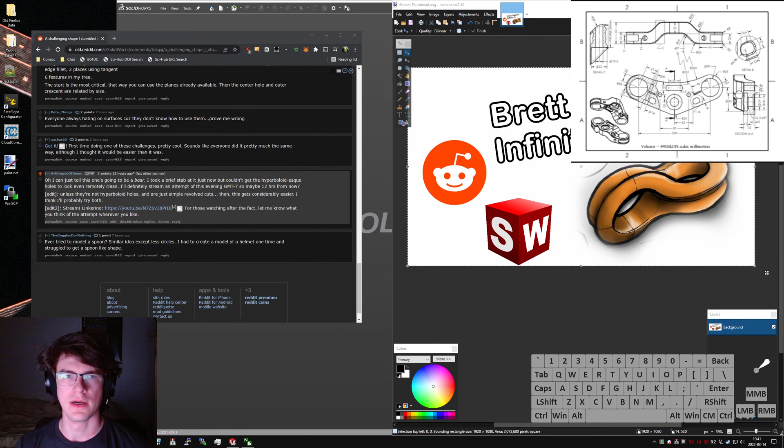So this post this morning from CADNurd, who is a CSWA and posts frequently to the subreddit. This weird shape, it's got kind of a... This drawing as it is, it looks like it was modeled simply, like this was just a curved, simple revolve, but based on the drawings, I could be totally overblowing it. Where's his link? Behance, here we go. So this is the original stuff from the guy who designed this. What's his name? Brett Mellor. Yes, Brett Mellor. From South Carolina, designs all sorts of things.

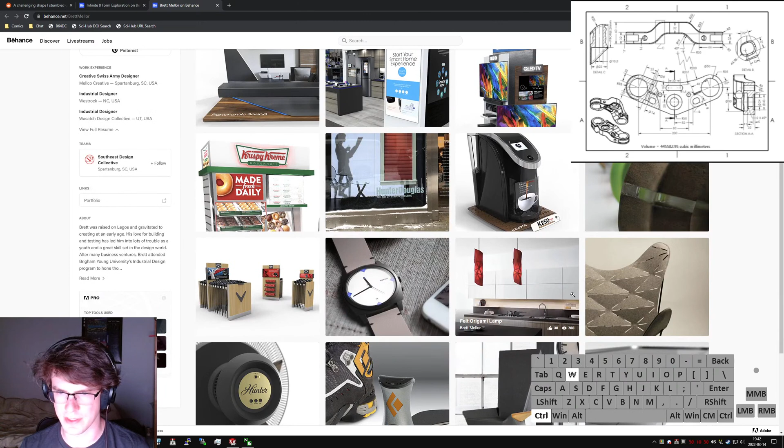The way this is drawn, and this line in particular right here, oh, there we go. That kind of makes me think that it's not really just a simple revolve, because it looks like that line's supposed to be straight, and those profiles are supposed to be straight as well, which is considerably trickier to model, because your revolved cut profile is no longer straightforward, and if you do it the easy way, that's just a single revolve, it would be a pain to machine that part unless you had a fifth axis. And we're machining this on the fifth axis.

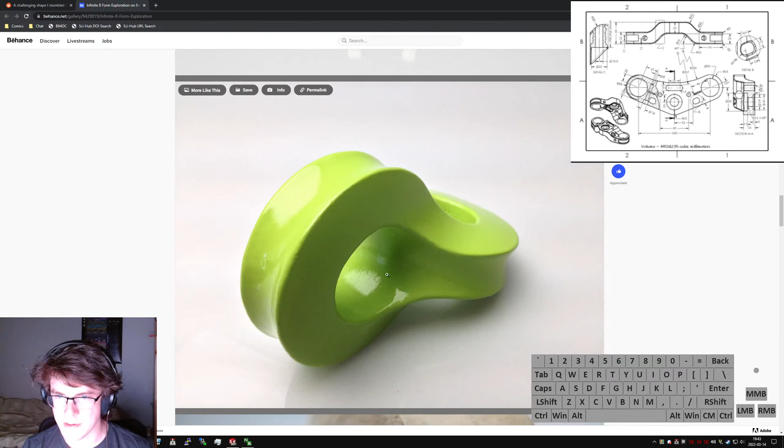Like you can tell, gotta have at least one other good view of it. Of course, he manufactured quite a few of these just because it's a fun shape to make. But the way that edge is shaped doesn't really look like it's a simple revolve to cut. Not to mention these straight sections, this looks like it's straight through rather than curved or concave in there. And that looks straight through as well, so it could be something he did after the fact to make it easier to machine. But I'm going to take a stab at first the easy way that everyone does it.

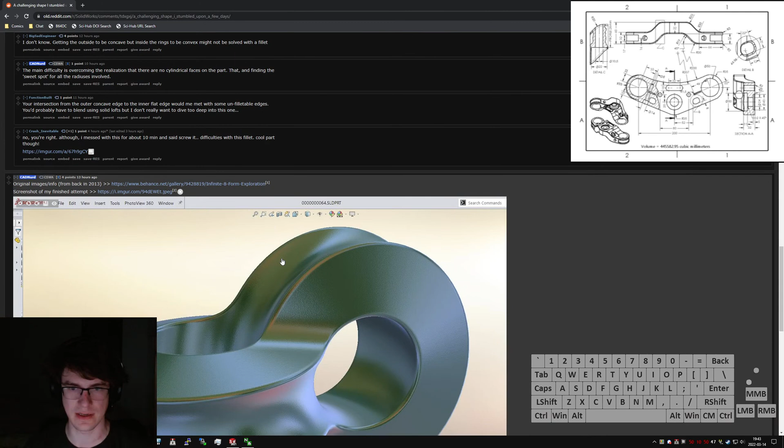Because I think the way I've been doing it is a little different than most folks. This guy up here, Smitty981, CSWE, so more experience, been around the block quite a bit more than I have. He's got 2 revolves, 2 cuts, 2 fillets, easy peasy. I'm going to do it a little bit differently because I want to try and use patterns, it's easier than drawing sketches and that sort of thing. So we'll hide that, pop chat out, drop it somewhere easy, and I just realized I left the reference image up that whole time.

From the last stream. Whoops. Okay, yeah, new part, let's go. Millimeters. So, pretty easy. What I have in my head is basically just 2 sort of cones back to back, and then with circular cuts on them. So we'll just do a quick sketch on the front plane.

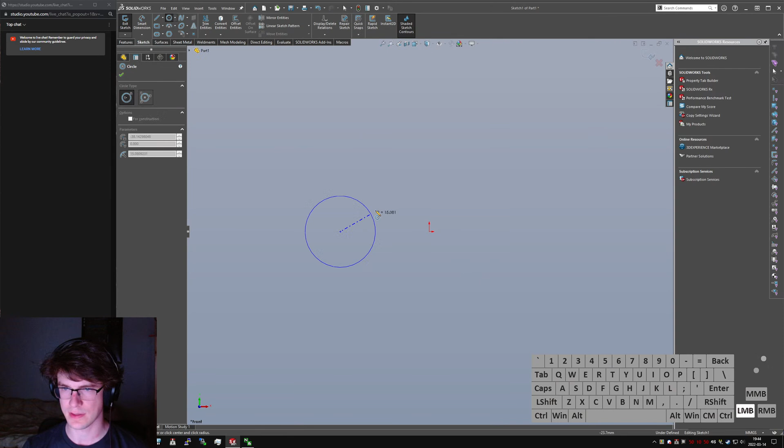Make this kind of like that. Give myself some lines here to define where I want all of my edges and things to be. Is that, come on, Alt-M? I don't get Alt-M anymore? There we go, midpoint, thank you. Okay, so these 3, oh, it wants to select everything. These 3, I'm just gonna make it equal. I think matching the form exactly is less important than the structure of trying to do it.

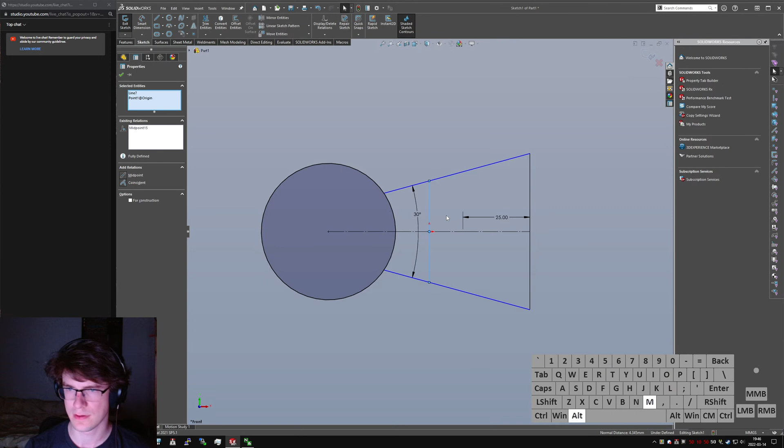So I'll just make that 25, I think, is what I've been going with. To be honest, I practiced this a little bit at work as well, because I just wanted to have a stab at it. Add these. Give this some distance, or some angle between them, and then what I've been doing is setting a height, using that, setting it equal to these, and that gives me a nice fixed height, and I think I have enough to work with here now.

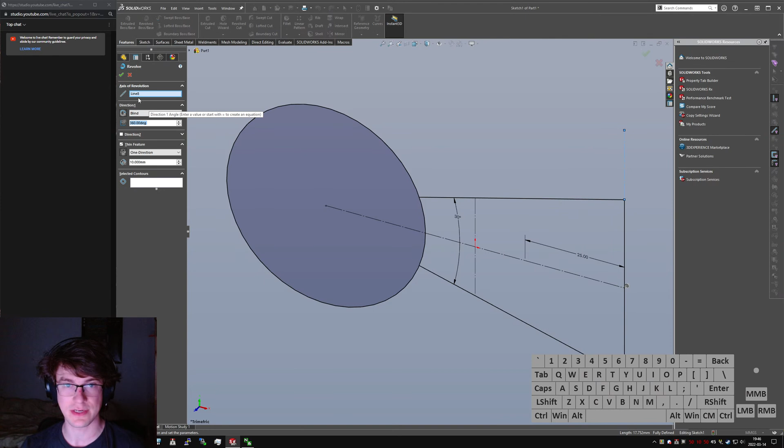So we'll do a quick revolve, say this axis. I only learned today, actually this morning, that you can pick a solid line as your axis of revolution, which is great because now it means I can make solids more easily. I always used to add an extra construction line up top. I'll even show you what I mean. I always added an extra construction line up top and tried to avoid using construction lines wherever I could so that when I hit revolve, it would just automatically grab that one and make revolve for me. But you don't need to do that, it turns out. So we'll just quickly get rid of that.

Only as much detail as you need. So let's add that axis, selected contour, this one. What? Results in contour? Wow, come on now. I didn't do that earlier.

Is it picking? What line is it picking? Okay, that's annoying. Maybe it does want that extra line there.

We'll do a revolve. Neater, neater, neater. Axis, grab that one. Contour, grab that one. Oh, thin feature. Durr, I don't want a thin feature. Maybe that was why I was complaining. Doesn't matter.

All good. Glad you came. Always glad to have eyes and just someone to look at the weird stuff I do. So, thank you. Have a nice night.

Okay, so got that structure in place. The way that I did it, and this is definitely not how most people would do this, there is some rotational symmetry. Yeah, always glad to have people watching later. Super appreciate it too.

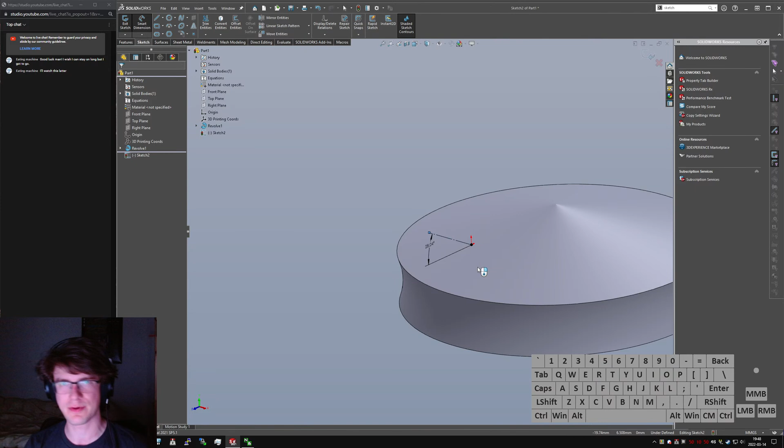But I think this approach is a little bit unique, recognizing the symmetry in the shape. Recognizing the symmetry and that there's an axis that goes right through here that the whole thing is symmetrical about. So using that, I can have a sketch there.

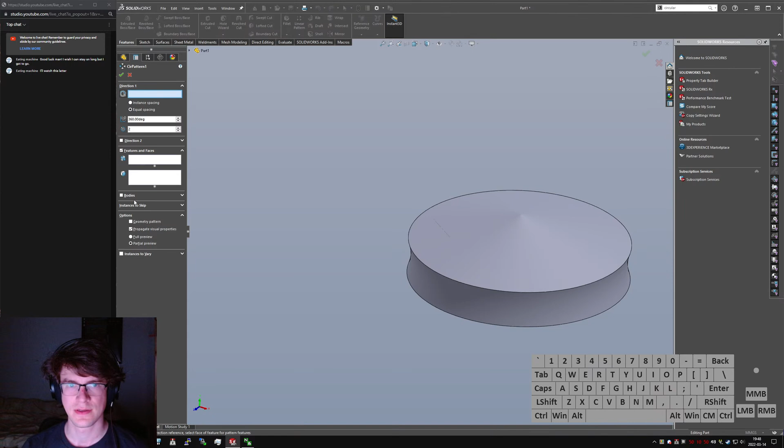Do circular pattern? Where are you at? We'll just add that and grab this axis. There we go. And now we can do a revolved cut.

Using the sketch we did earlier and adding that circle back, which is why I added it. It's tremendously powerful to have multiple features in your sketch if you can manage it.

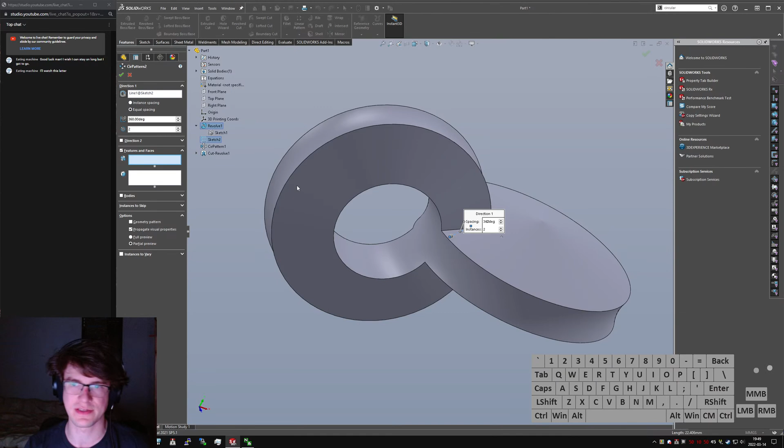And do a quick circular pattern. Grab that, features and faces. Fun fact, if you click here, it won't actually do things right because this face was created by the revolve feature, and that means that when it goes to try and figure out what feature you want to grab just by what face you clicked on, it's like, oh, you clearly want the solid revolve feature. Because the cut revolve didn't actually add a face. This face is all contiguous, so you have to click it from the tree.

But it patterns around, gives you your hole. Do a quick, I think 30 is about right for these. And you can do connected to start face too, which is nice. And 30, fill it, all edges touching this face and this face. Make that like 2 mils.

And yeah, there's, hang on, where's the Reddit post? Did I really close it? I'm gonna feel really stupid if I closed it. Yes, here we go, okay. I did kind of close it.

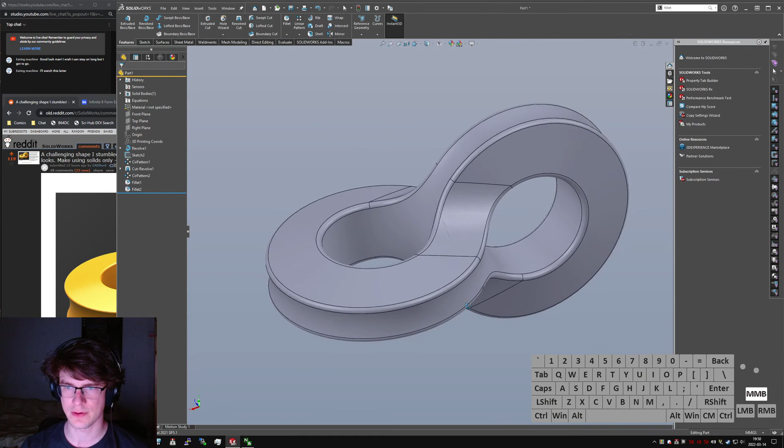Oops, we're the wrong way around. But yeah, there we go, there's our shape. So this is, fundamentally it looks like it even matches in the reflections in this model, but I think this is CADNerd's attempt, not... well, we'll zoom in a little bit and look at the post again.

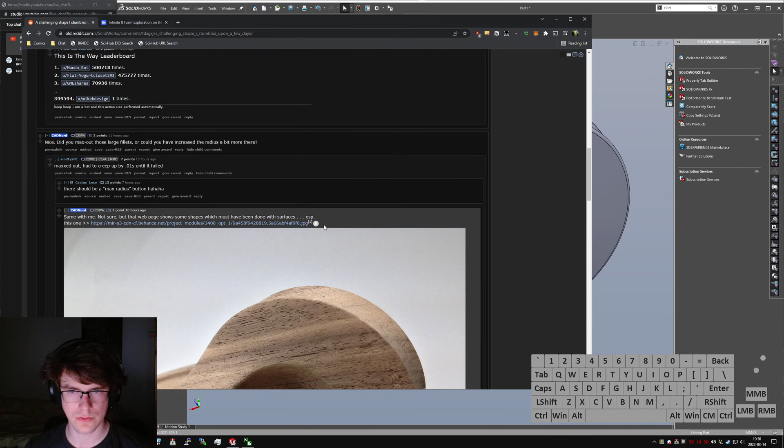Must have been done with surfaces. That actually you don't have to do with surfaces. Let's show how to do that with not surfaces.

Instead of doing a cut revolve, we'll suppress all that and go back up here. And let's do a sketch on the, hang on, what sketches have we got already? We've got this sketch. Yeah, let's use this. Okay.

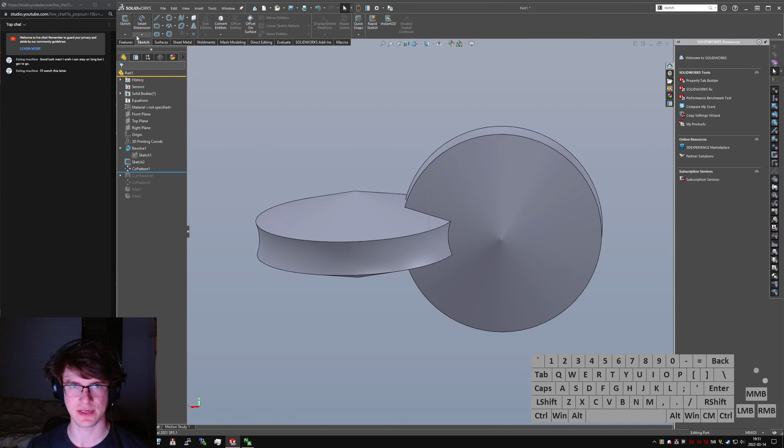Oh, how can we do this? This is gonna be weird for sure. I don't think I'm gonna reuse a sketch to do this actually, because that would be frankly rude to anyone looking at this model in the future.

Let's pop a sketch in here. Okay, I want, well, I will have to reference this sketch just so I can grab all my points, but we'll grab a center point, say here to, ooh, whoops, no, I want to be on this, I want to be on this center point. Let's go here and around and make it coincident with that. And that'll lock it in. And then, oh, how do I want to do this? I'm going to try a swept solid, I think, is what I'm going to do.

Let's try a swept solid. Okay, so the way to do that other one is like this. Whoops. Nope, don't be coincident with the horizontal there. That would be kind of annoying. Just make that like that. Trim that and that.

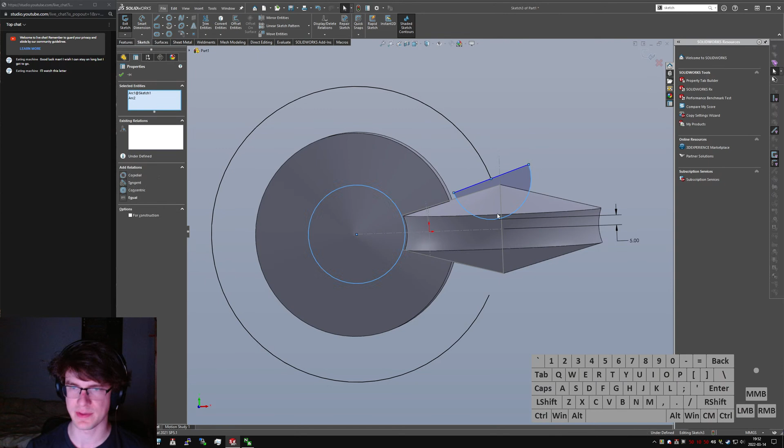Okay, so now we can say that we want to come... let's have 5 millimeters of space. And we know that has to be the same diameter as that, or we're just going to kind of guess that it has to be the same. And we'll make this—I think I'll add another line here, make that tangent, and make those perpendicular.

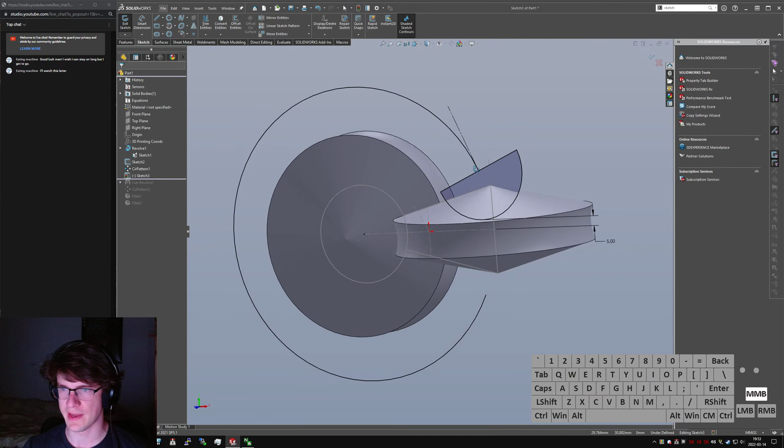And then I can add a revolved body up here. Ooh, no wait, that has to contact there for that to look right. Ooh, maybe I can't do this this way. What does the other one look like? That's really close.

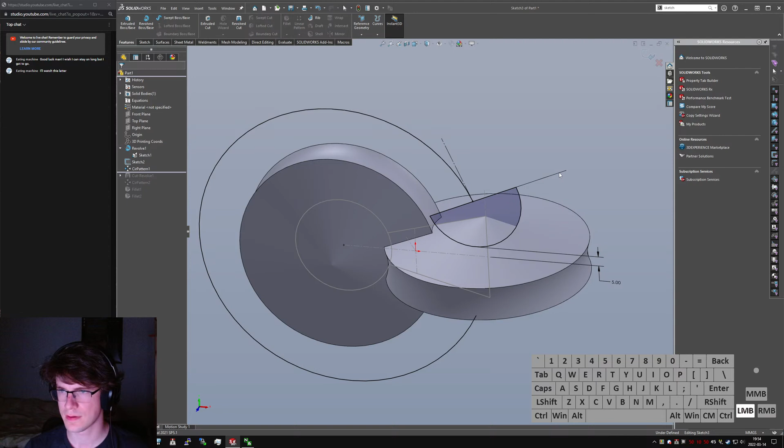Yep, so I'm going to add an extra line up here. Let's make these all the same length, just so we don't have anything left undefined at the end of the day. Not a thin feature, just selected contours, only about this axis. What? Oh, it's trying to merge result. Don't merge result. There we go.

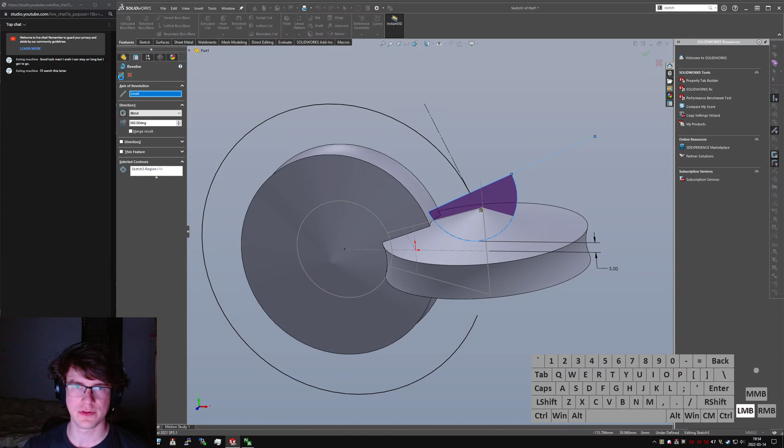Okay, now we go to this sketch, and we briefly wonder why it is... it's because that one's not defined. Make those vertical, and then that's fully defined.

Okay, now swept cut, solid profile, select a solid, this one, pop open the sketch we did earlier, use quick visualization anyway, and say give me that path. Path must be fully tangent, continuous, and solid sweep. Ah, okay, so I do need a new sketch.

I'll just pop it into the front plane here and say convert. Come on, come on, you can do it. There we go. Convert. Okay, exit sketch. Now I've got a reference sketch. Hide this. And what's this one doing still?

It's like I'm still in a sketch. Why is it still showing those? Oh, I never even saved this. Dirt.

Very smart. Okay, we'll call this Infinite 8. And I forgot to save it with the other features, so I'm going to save this one as Infinite 8 Clampy. I don't know, I'll figure it out later.

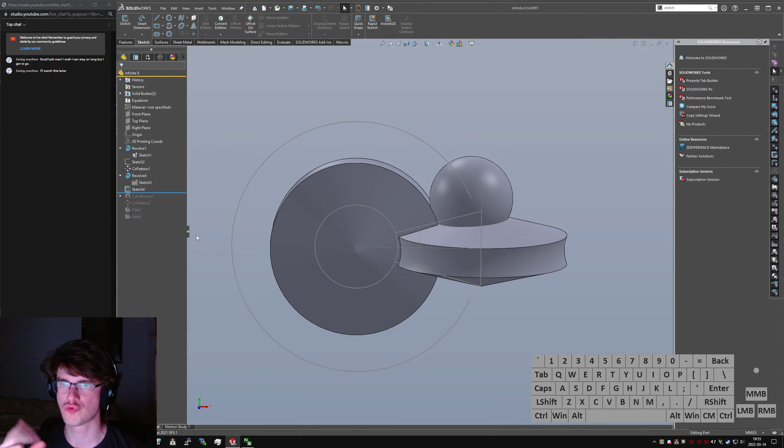Okay, so this should be hidden. This should also be hidden. No, wait, no, I can pick it later. That's fine.

Swept cut. Solid profile, pick this guy, and that sketch. There we go, our little dimple. Doesn't look right. Don't know why it doesn't look right.

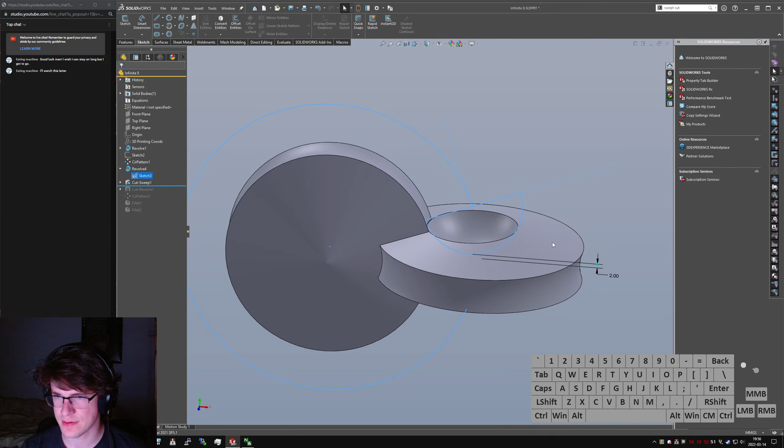What happens if we bring it a little tighter? Say 2 millimeters. Yeah, that doesn't look right.

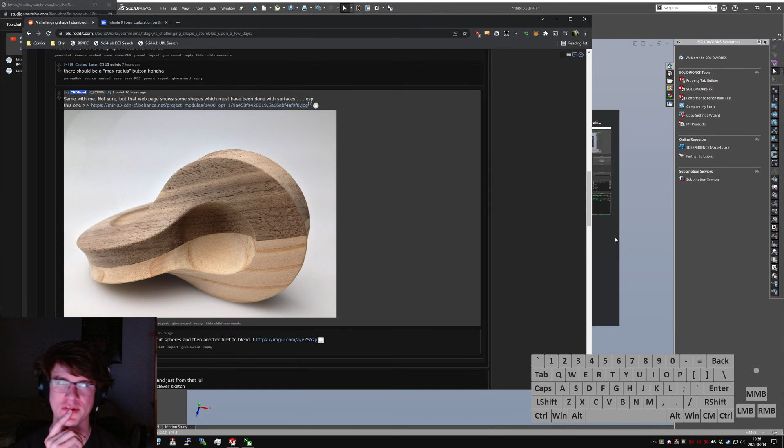This is not a simple shape, and everyone who says that it is didn't look very closely. Because eventually, if you want that to actually match up, we'll just go in here and quickly—let's see how I got this defined right now. I've got that defined with that, but if we instead define it by making that pierce there so that it's continuous, it still doesn't... well, and then the cut sweep self-intersects, so no, it won't work.

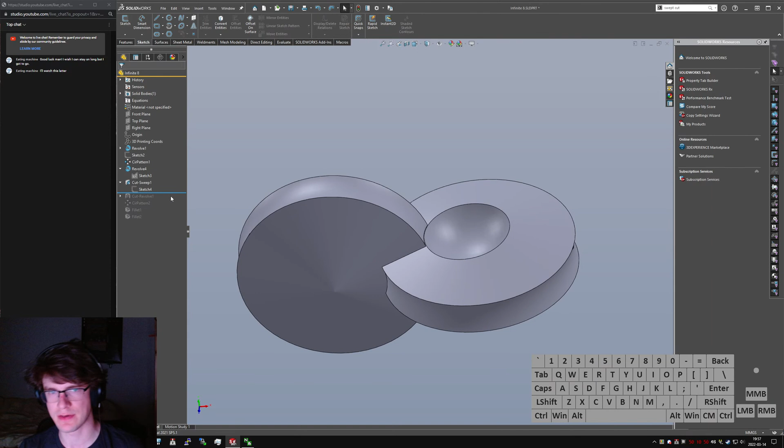Yeah, this is not trivial. Yeah, okay, so let's back out of this a little bit. Let's pop you two out. Sketches. Okay, so we got the infinite 8. Save as—we'll call this like Infinite 8 dash Hyperboloid.

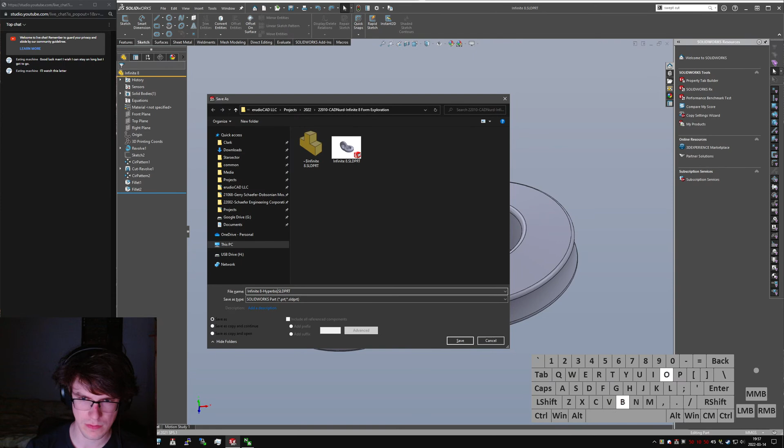Because these are supposed to bend out, I think, and it's really not clear to me how that's supposed to work. So let's come back up to the first cut. Boss, top plane. This is going to look weird for quite a while until it gets to making sense.

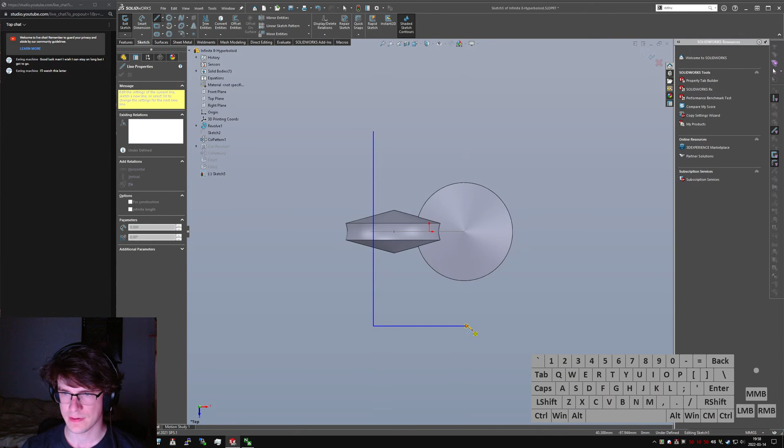More concentric. They're already concentric? They are now. Coincident. Again, it's like midpoint. Rather than being coincident, I want Pierce.

Okay, so then this gets basically as big as it wants to be, which is probably fine, but I think I'll limit it to... I'll limit it a little bit so we can have these two be equal. And also construction.

And now we'll do extruded boss base. Oop, I have to go check that sketch first to figure out how thick it needs to be, or rather which dimension I need to grab. I think that's—did I make that D2? Right click, something, come on, just give me the name.

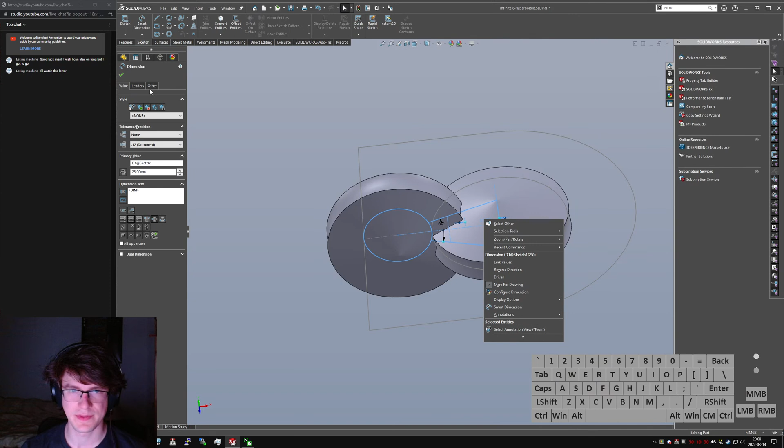D1 sketch 1. So I'll do double that for this thickness. D1 at sketch 1 times 2, and do not merge, and be midplane.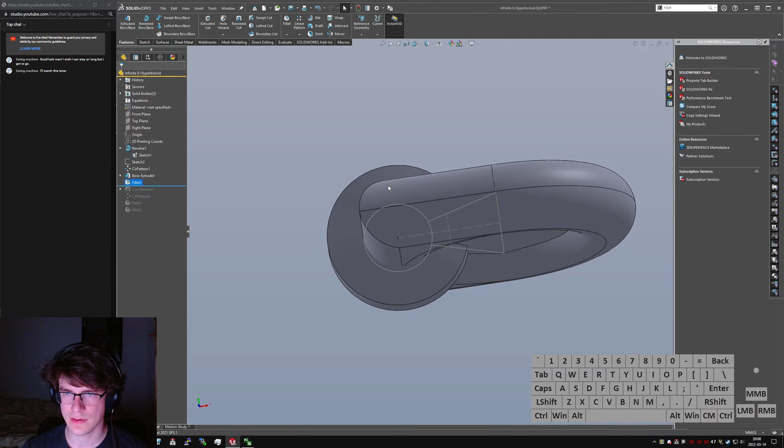Now I go back and I add fillets that are equal to D1 at sketch 1, and we'll do here and here. Go quick subtract, or combine rather. Subtract, main body, secondary body, let's go.

Okay, so now we're closer to the hyperboloid, but we're not actually quite there yet, because we have this flat profile, but we're not expanding outward. So I need to—once I've filleted it, which I think I don't want to do that way, now that I look at it—just this face and just these two.

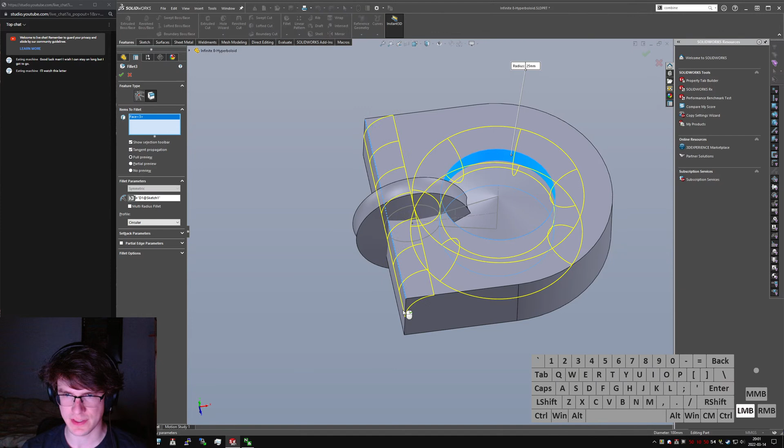It's like, how do you cleanly make that transition? Let's try something. Let's try sketch on the top plane. And I'm gonna try something like that. Some natural symmetry here, make that vertical.

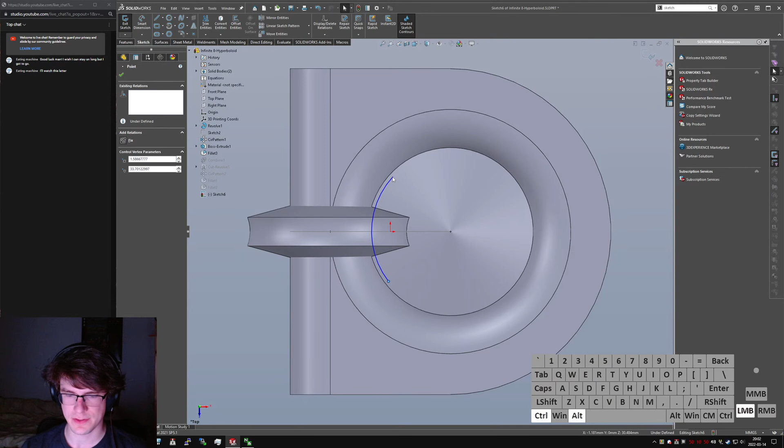We hide this body since we don't really care about it. Make those co-radial, I think is what I want. Make this, say, 50 millimeters high, that's probably good enough.

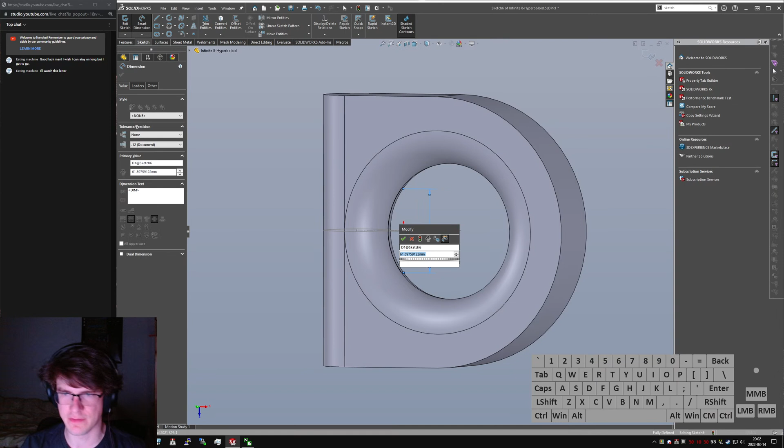Then we're going to add another quick reference axis and define its length there, and then do revolved boss. Sketch is currently open, I do not want it to be closed. I would like it in revolution. Auto select, do not auto select. Select only that one.

And that's the problem. That's the problem you will run into, is that if you then combine it, you somewhere eventually end up with a sharp edge.

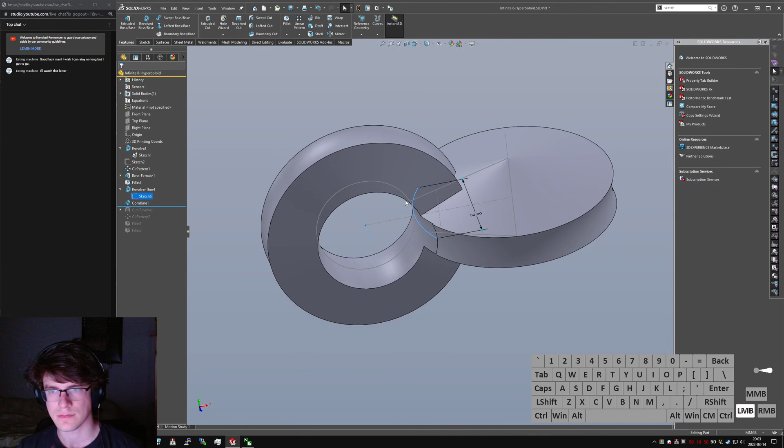Even if we make this, say, 75 — whoops, 75, not 43 — rebuild. Eventually you run into an issue there.

And now it does have the right cavity, and in fact you could even — well, I guess you can't get revolved anymore.

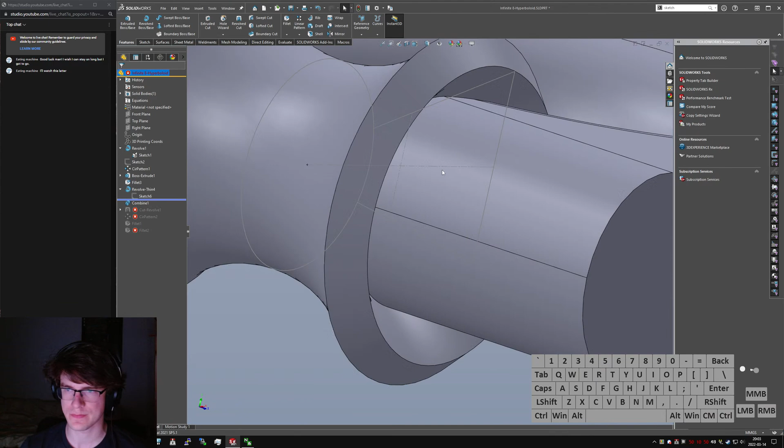This is the part I don't know how to solve, is I don't know how to make this transition nicely. And I don't think anyone else does either, so I welcome solutions.

I suppose I could do something like... what? How do you even shape that? How do you make Solidworks okay with that?

Oh, it doesn't like 25. I'll make this equal to D1 at sketch 1 minus 5 millimeters. Oops, 5 millimeters.

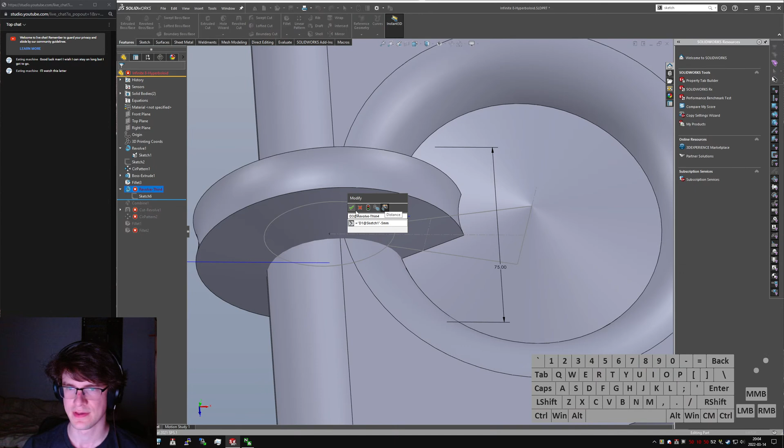Hang on, why is that going the wrong way? Something's wrong here, why is that? Oops, not the circular pattern. No, the thin revolve. Oh, I'm dumb, just clicked on the wrong feature.

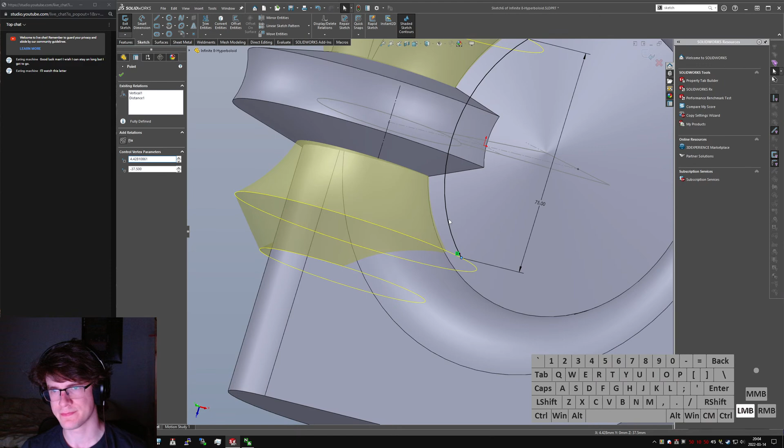Maybe. Well, let's try this, let's try — don't be co-radial. Keep the verticality, don't be co-radial. Instead, just drag you out of the way a bit.

And oh goodness, it's still... can I move this anymore? Oh yes, because that's still a point, so I can still make that independent.

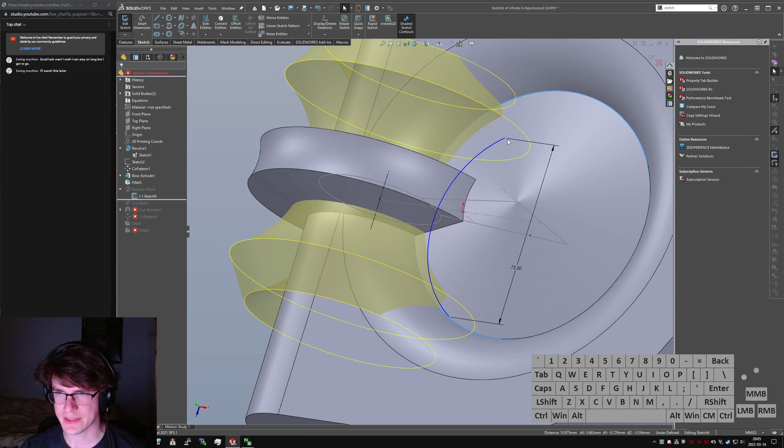I want this to be on these edges, but let's see, on those edges. But I also want it to be on that point. Let's try that — what does that look like?

When we combine it, does it subtract something nicely? Looks like it, and keeps the hyperboloid. Hey! Hey, there we go. Alright, let's shrink that a little bit so the effect isn't quite so extreme.

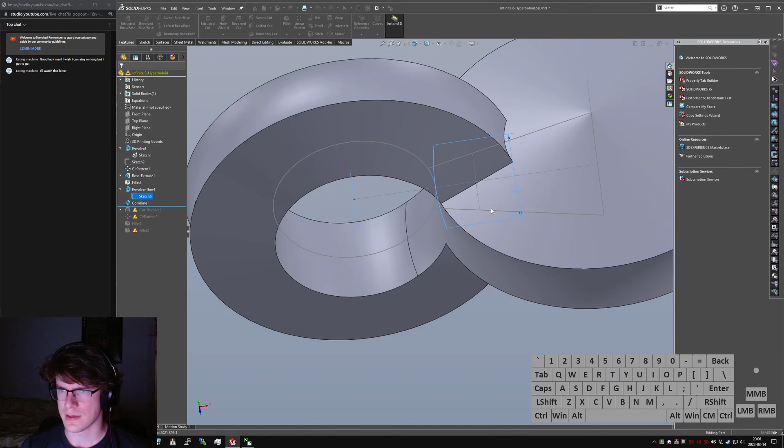And it looks like we can get more and more gradual. Oops, no, has to be at least, let's say, equals 1.5 times D1 at sketch 2 — or sketch 1, if I could spell sketch. There we go. Okay, maybe 1.25?

Oh, let's rebuild it and see. That looks good. Certainly comes a lot closer to — oh, actually, here's the real check: can we fillet these edges?

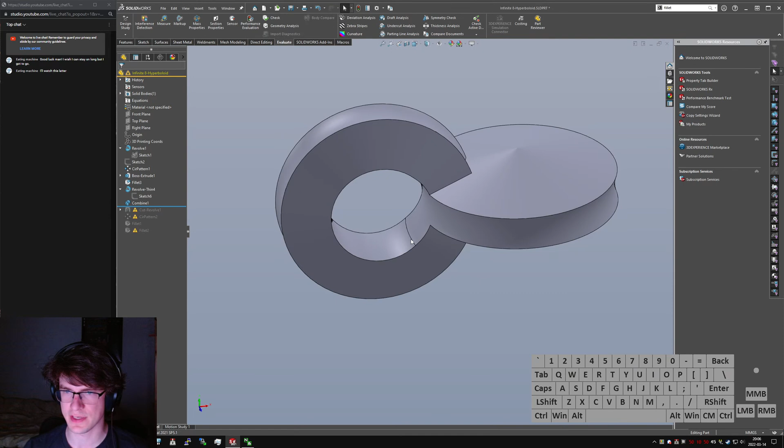And if so, by how much? Like, 1,000? Nah, I won't do that. How about 200? 100? 50?

Yeah, those are some really slight edges, like really minor discontinuities. But that's how you do it. And then if we look at it from the front, it's got our — it's got the section right.

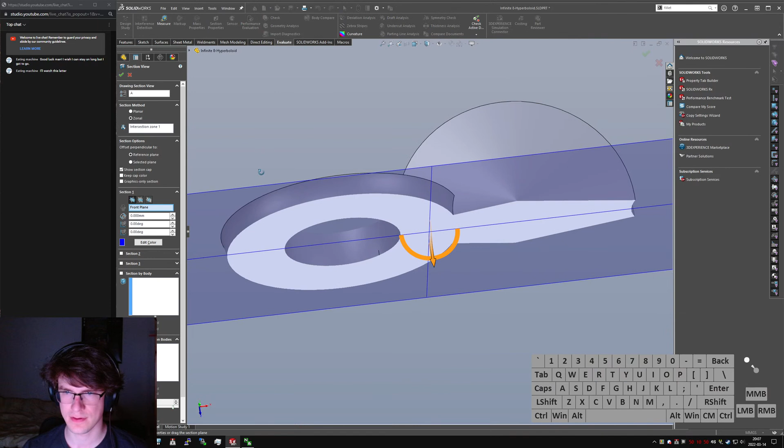Let's do this from the top plane even. Yeah, there we go, hyperboloid. And the curvature doesn't exactly match, but it's a lot closer.

So now let's pop the cut revolve. Or hang on, before doing that, let's edit the circular pattern to instead pattern the combine. Nope, can't pattern the combine.

Cool, okay, what we'll do instead is we'll move this down here. That's getting in the way. Edit the circular pattern to, instead of features, I want it to pattern bodies, and I want it to pattern this body.

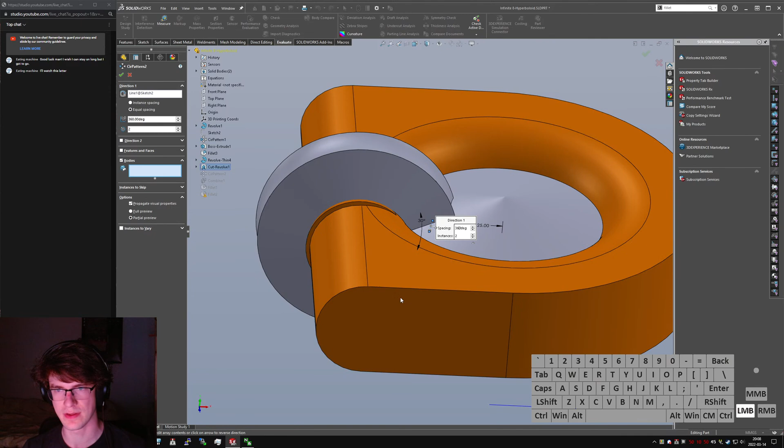And I want it to... I don't think it'll merge by default. I think it'll just end up with multiple solid bodies. No, wait, what? Did it just... what? Oh, oh hang on. No, it was combining, so now I have 3.

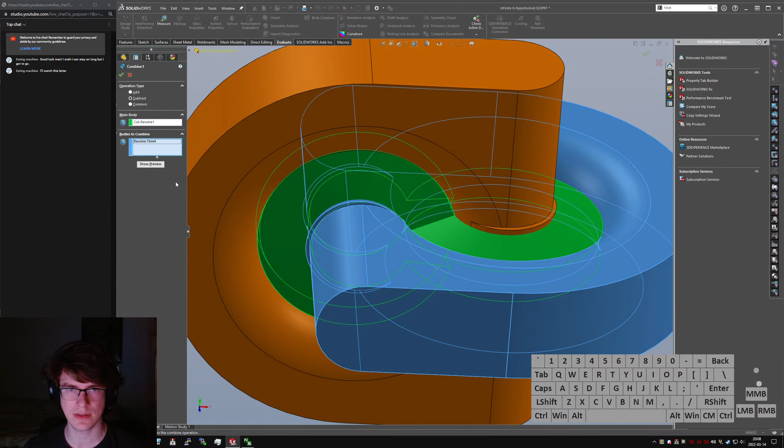But if I combine — bodies to combine — yes. Yeah! Yeah! And, oh, I was really hoping that last fillet was gonna work, but...

What's it complaining about? Oh, I see, it doesn't like those. So we can clear selections. Yeah, okay, so it doesn't want to pick those tangents. That's neither here nor there, really.

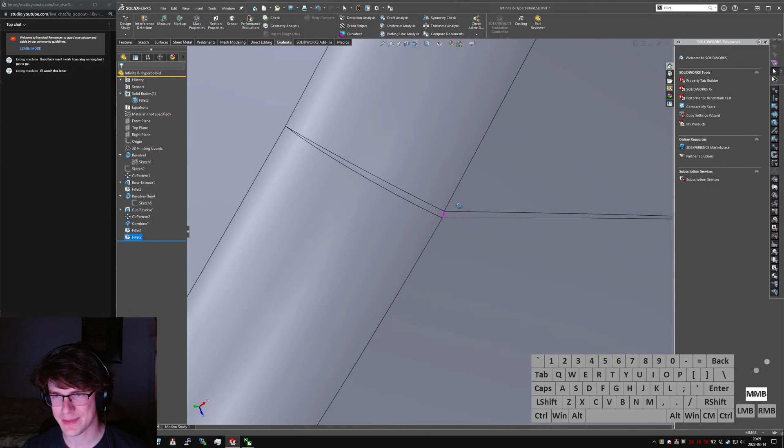Oh, hey, if I just pick everything, it works. Cool, I'll take it. It's a little bit gross in there, but given that this now accurately matches the hyperboloidy bit, I'm pretty pleased with that.

So the other thing you could do is, we'll just try it and see what happens. Curvature continuous fillets, it'll probably break because it has to be curvature continuous in some really weird ways. Oh, hey, it didn't break. It will, however, drastically increase the rebuild time. You could even check that. So rebuild time, that last fillet takes 4 3/4 seconds.

What happens if it's just circular? Come on, it takes 5 seconds just to rebuild its preview. So let's not do a preview, instead just be circular. Evaluate, performance eval: it takes 1/10 of a second, so drastically quicker if it's circular.

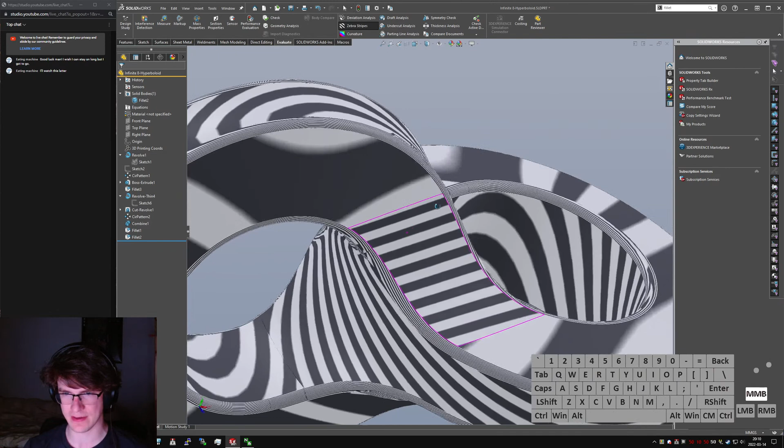And no one's going to be able to tell in a model like this. I mean, sure, you can... maybe somebody will break out like a... I have no idea, can you even monitor curvature in real life with anything besides, like, a... yeah, there's some minor discontinuities, but I can handle those. But now we match the hyperboloidiness, which is fun.

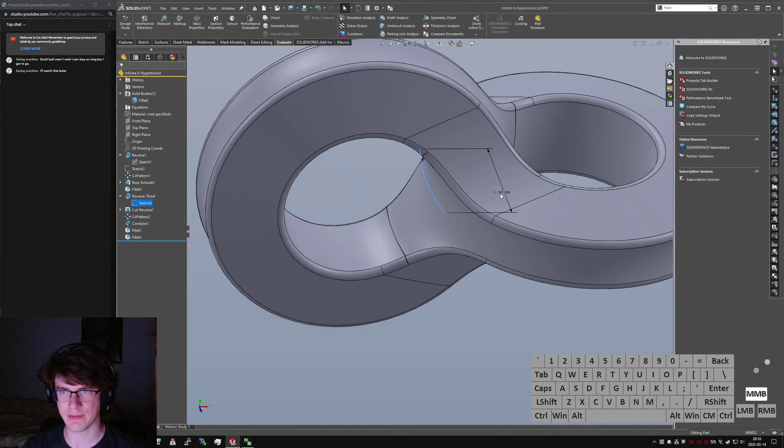What happens if I make this bigger? So if I bring the scale factor up to like 4, probably won't work, but 3 might. If I rebuild, it takes up more of it. Interesting.

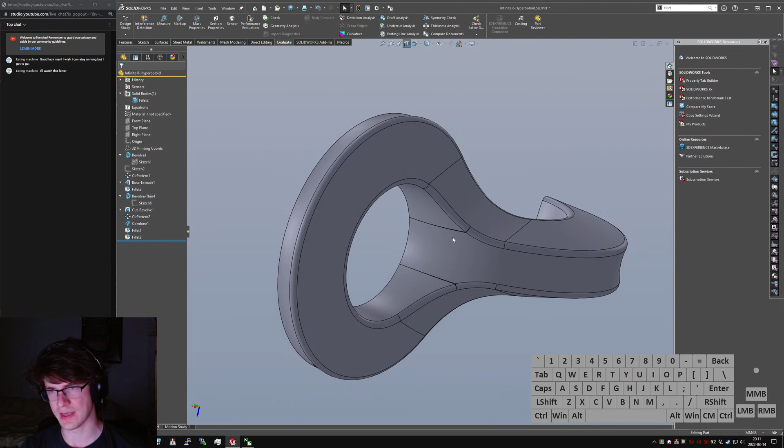If we look at the cross section, what I'm most interested in is, are those tangent? Distance between circular centers, 0. So it's a little off tangent out there at the edge, but I bet if I just keep making that bigger, I bet it just keeps getting better. Because, as we all know, bigger is better.

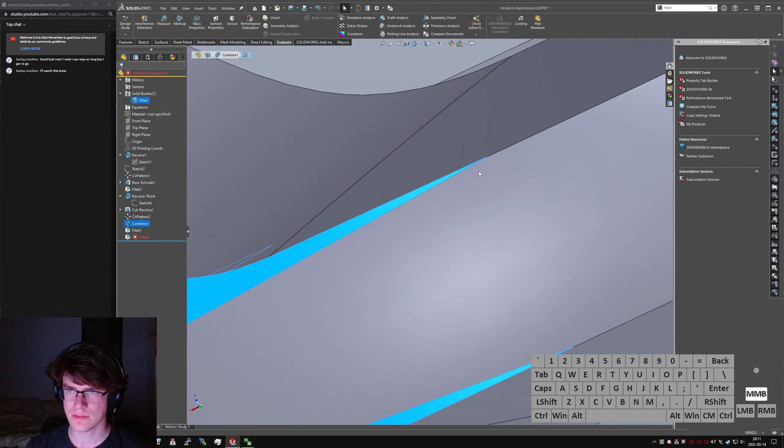Will it even go to 4? It might error out, because that'll be large. Yeah, it errors out. Does it though? What's that sketch look like?

We go up to that circular pattern there, or before the pattern, I think. Oops, not the cut revolve, please. Hang on, why are you still here? Oh no, that needs to be there. Or, no, it doesn't, it doesn't need to be there.

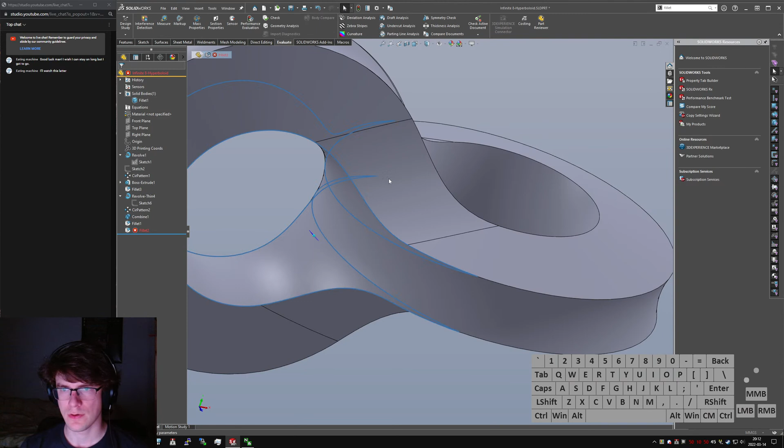The fillet will probably complain now, but we can tell it to just be quiet. Ooh, I wonder if... okay, so those faces don't work now. Do these faces work? What? No, give me the face, please.

Seems to like that. Whoops, nope, don't edit that fillet. Here, how far into this? Half an hour? Not bad for getting the hyperboloid.

Outside, outside, inside. Inside, inside, outside. Insides and outsides and all arounds. Yeah, okay, it throws a fit.

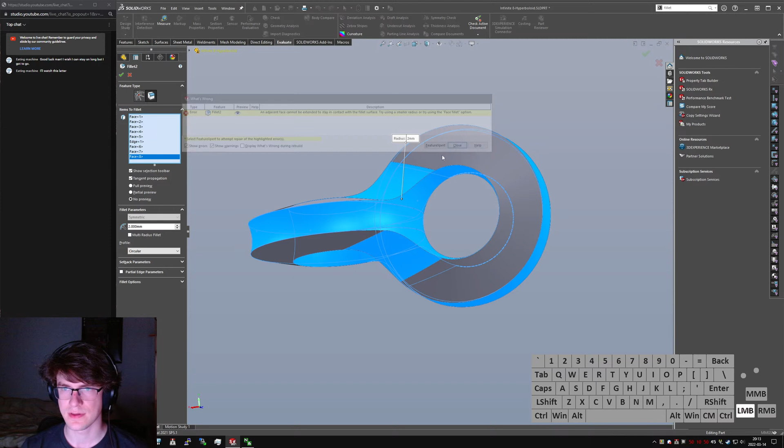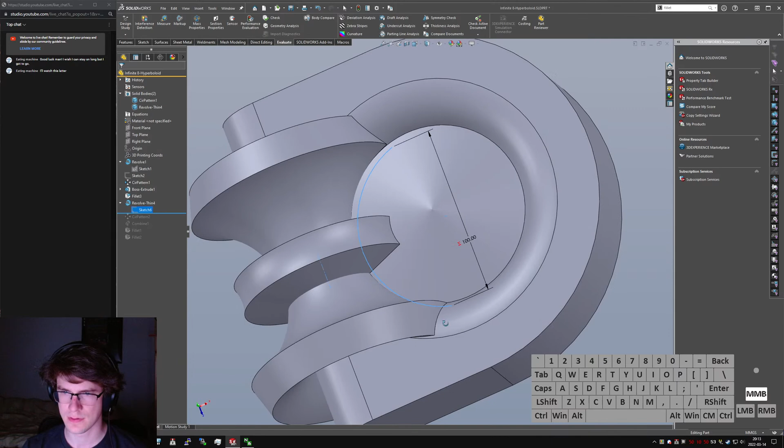I think the problem is that those are too close together for it to adequately trim things together in a nice way. So that can be pretty large, but I need to make sure that... ooh, if that matches that point, I don't know how to make it do that. Let's do 2 or 3.5. That seemed to work fairly well.

But if I can match, no, if I match that point, I will trim inwards, and then that won't work. So it does have to be this way.

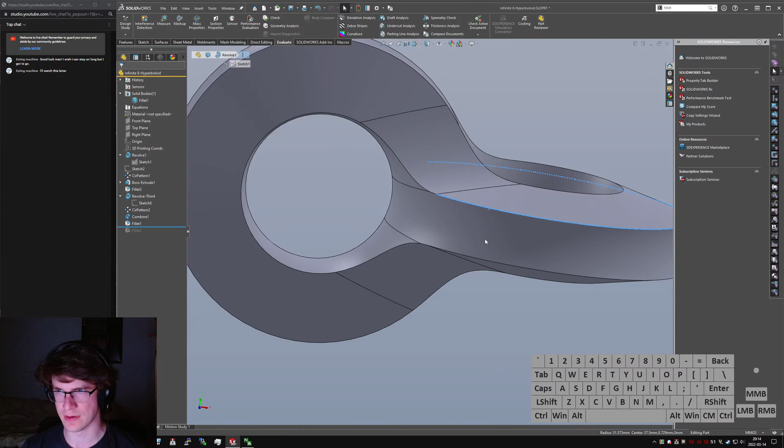What I'm thinking about is if I can make it match up at this edge rather than down here in the center, then hypothetically it'll be a more close fit. But as soon as I do that, I think I'll end up undercutting in there, which would be not good. I'm just pushing it too far.

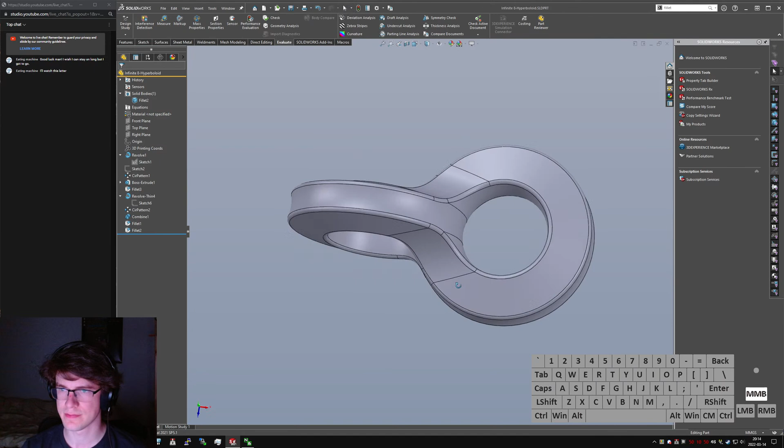Well, hey, there's a shape. There's a hyperboloid. Yeah, I don't think there's anything else really to add. Some people did some flair with like making that an ellipse. The big good solution that I saw used that, and it does look pretty, but that's not the tricky part of this part.

Is that gonna break at 35? I bet it breaks. Okay, it doesn't. But yeah, I'm pretty pleased with that, all things considered.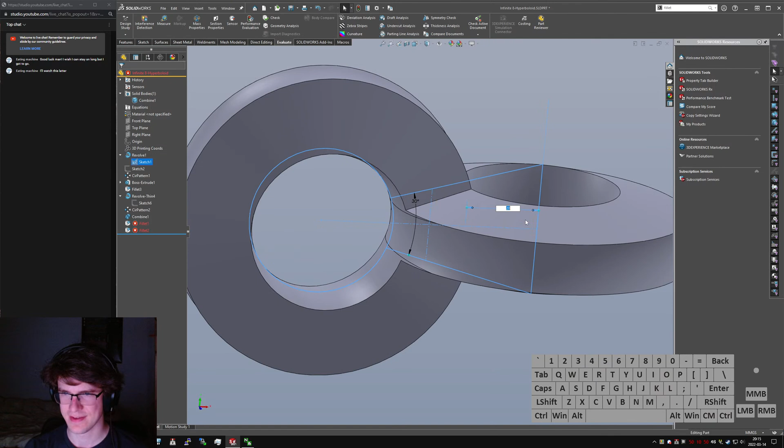Fun fact: this is now scale invariant. Minus the fillets, I think, possibly. If I go down to 20, that might break. Yeah, the fillets will break. And then that breaks everything else too, so. At 25 it stays.

Ooh! Because this is based on the same thing. Hang on, let's do some macro comparison here. Reference document. Well, it's easier if I just open it first. Recent, Infinite 8.

So this is a feature that I don't see people use a lot, and that I wish more people used, because it seems super crazy, ridiculously powerful. I don't care about properties, I only care about comparing geometry. They're going to be aligned by default because they're basically the same part.

Let's pop that over. Hang on, go this way. Go this way, like this. Like these. Okay.

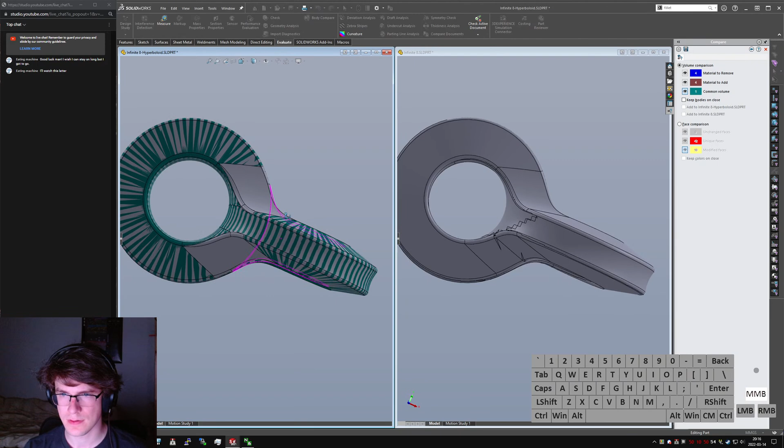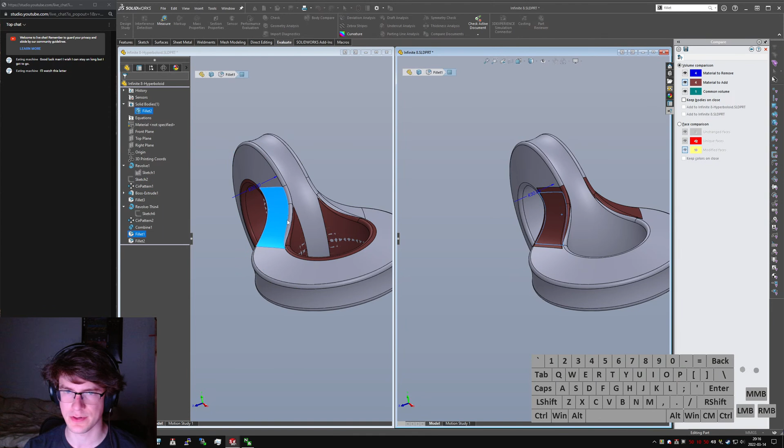So, we've got the common volume. Oh, I changed the size of that fillet. Hang on, these won't be comparable now. It is 30 over here. Dang it, okay, hang on, gotta fix that first. It's gotta rebuild itself and sort itself out. Save. Okay.

Now, once more into the comparison. Reference, well, actually we should make the infinite 8 the reference, and the hyperboloid the new one. There we go, that's looking much better.

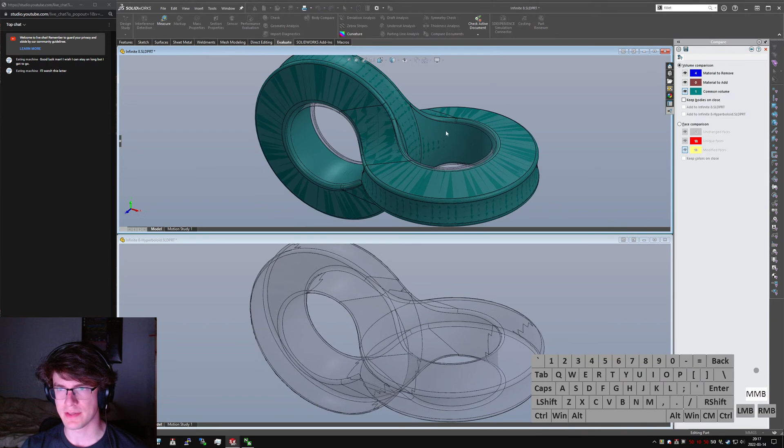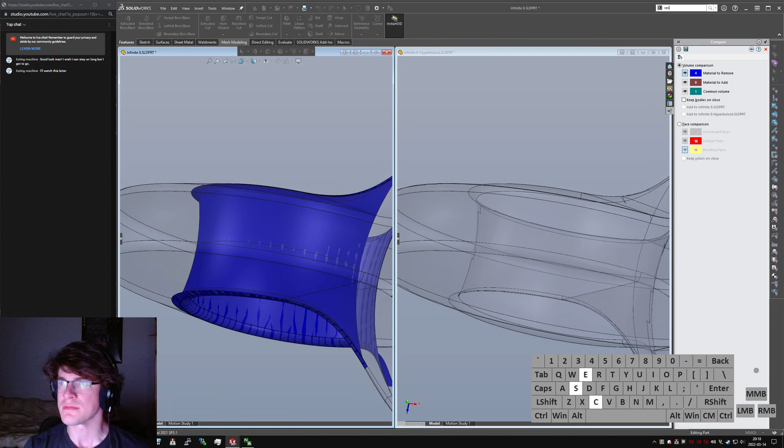So, common volume, material to remove. It's just adding some material, or rather removing some material around the edge there to bring it a little bit closer to the true shape, I think. And it's really close too, actually maybe that's just the mesh, it's kind of hard to tell. Can I section this? That would be nice, I think maybe I'd have to do live section planes or something in order to see sections, but the gist is, I think the hyperboloid is kind of necessary to get the shape right on this one.

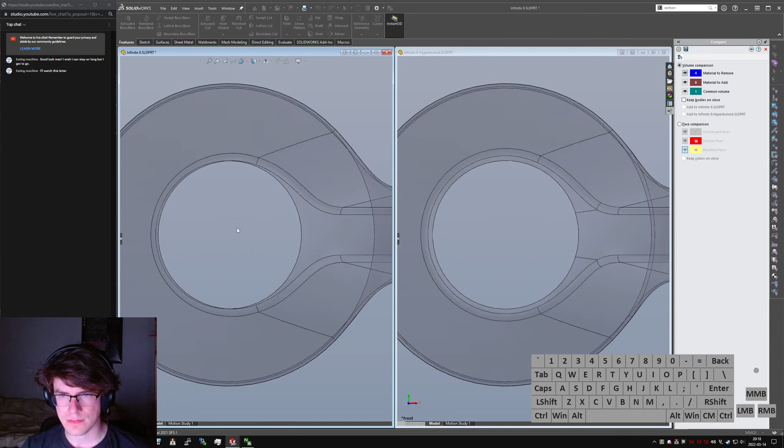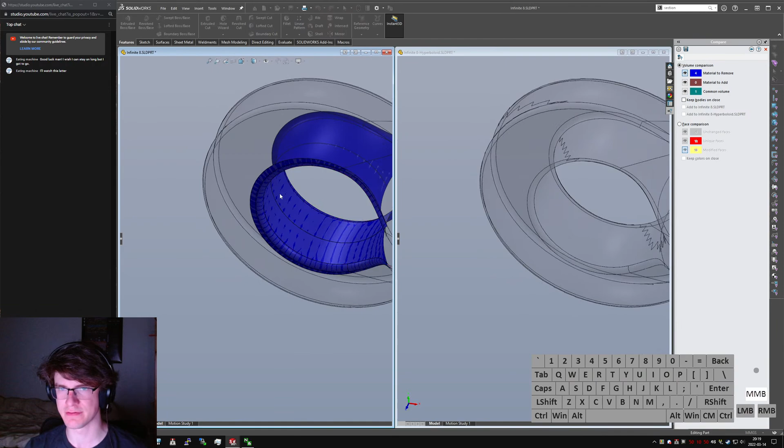So if we show common volume, the infinite 8. Oh, hang on. Is that cutout bigger? What? Oh, yes, oh wait, okay. Yeah, this cutout is bigger, because I'm looking at the ghost of the original one, which would have had more material on the inside of this bore. All is well. I'm still seeing kind of, and it approaches almost nothing in the middle there.

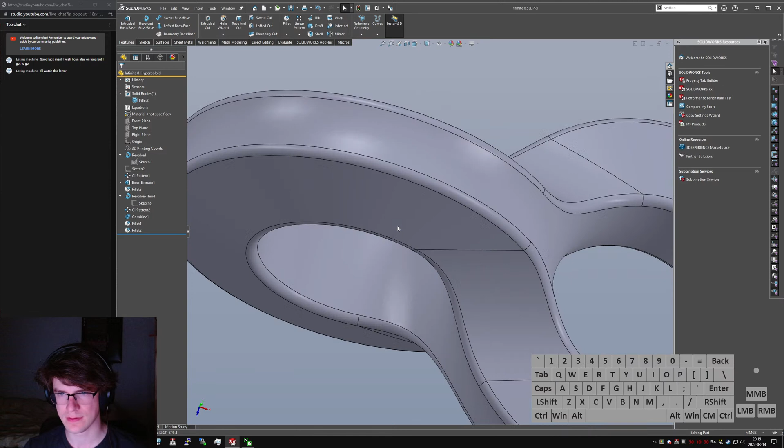So, compare tool, super handy. Just direct comparison of parts. Really super duper underrated. Pop back, go back to my feature tree. Does it stay per document? It does. And you can even tell, like the only thing it does is open those holes a little bit more.

And I think let's do curvature. Does it not? I could have sworn there was a thing to show curvature under Solidworks, curvature under pointer. Come on, dynamic highlight from graphics view. I'm pretty sure I can just go into the settings and search that and it'll come up. Dynamic highlight, graphics view. Yeah, why is that disabled? 25 versus, or exactly 25 versus something a little larger than 25, but the same everywhere else.

Okay, well, that's all I had on this one. I hope whoever it is that watches this down the line, I hope you learned something, and also to look closer at the models because it's never quite so easy.

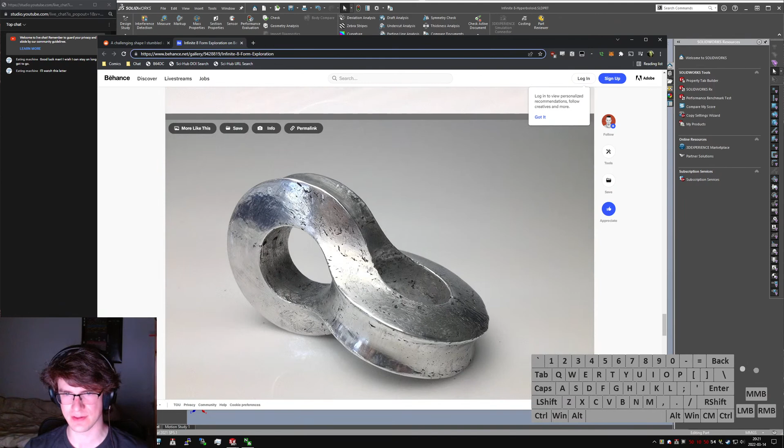I think what really tipped me off was with just those straight lines. Those shouldn't be quite that straight, and that looks like it bends out a little bit. And these ones look like they're either straight or bending out a little bit. And if they were truly just a revolved cut, then how are you going to machine that? I mean, there are... what am I thinking of? Exterior radius cutters? There's got to be a name for this type of cutter that I'm thinking of, but I'm thinking of something that looks...

Ah, hey, wouldn't you know it? This. You'd need one of these in order to cut this. And, my god, that's $150. Don't design parts that need to buy those. Is there a name for this? Okay, radius cutter. I wonder if there's, like... okay, yeah, you could get cheaper ones, but as a design guy, I bet he's not using the cheap stuff, so...

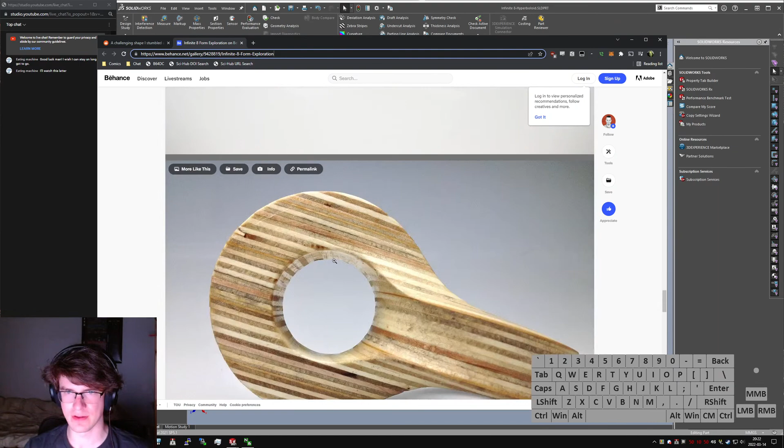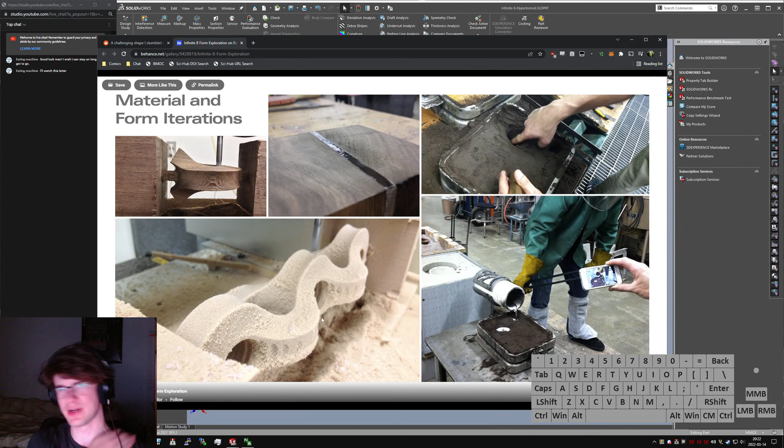And they're clearly using CNCs to manufacture some of these as well. In the earlier... where is it? Come on. Here we go, that right there. That's somebody's giant 4x8 CNC router. And, you know, oh, we did it in 2 pieces. What? That's a cop-out, that's way too easy. You can't do it in 2 pieces like that. I don't know, I'm probably being too harsh, it's a tough part to machine, so.

I wish I could do sandcasting, though. That's something I've never done. On the to-do list for skills to learn.